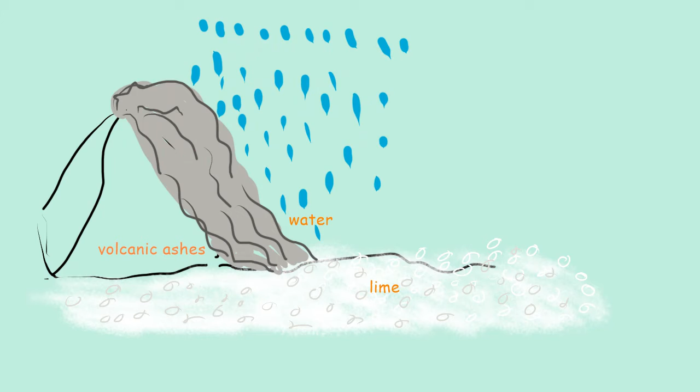In fact, the origin of hydraulic cements goes back to ancient Greece and Rome. The materials used in these buildings were lime and volcanic ash that slowly reacted with it in the presence of water to form a hard mass. This is the definition according to the Oxford Dictionary.

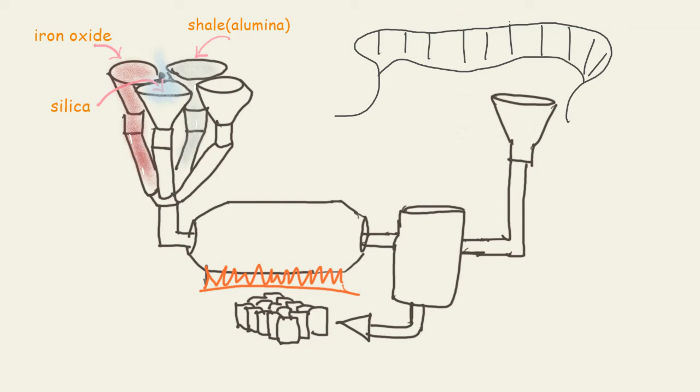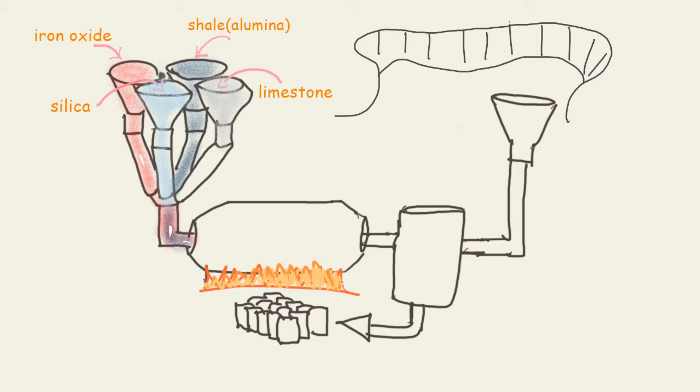Let's see what goes into the manufacturing of cement. Quarried and crushed iron oxide, shale, silica, and limestone are mixed together and run through a rotary kiln. This forms clinker, which is ground to fine powder and mixed with gypsum, and then bagged for sale.

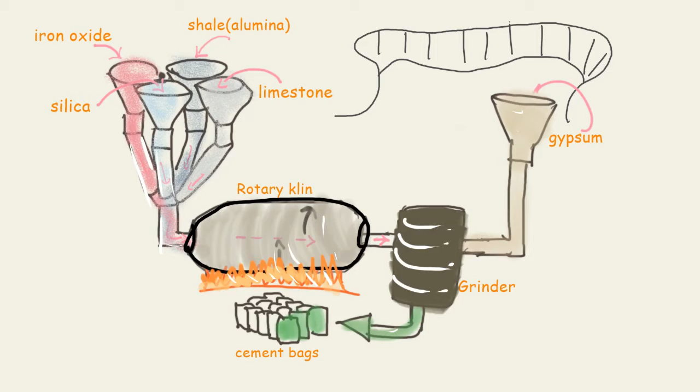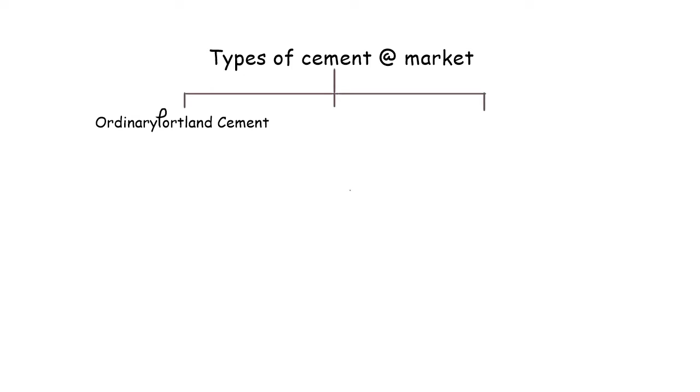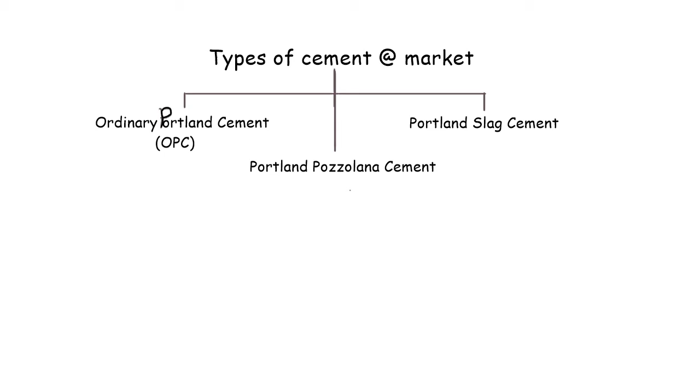If we break down the types available in the market, there are generally three: ordinary Portland cement, Portland Pozzolana cement, and Portland slag cement. These three are known as OPC, PPC, and PSC in short.

Usually we buy ordinary Portland cement, that is OPC, based on their grades: OPC 33, OPC 43, and OPC 53. OPC 33 has mostly been phased out in the country.

This grade of cement is used for general construction under normal environmental conditions, but low compressive strength and availability of higher grades of cement have impacted the use and demand of OPC 33.

OPC 43 is nowadays largely used in plastering, flooring, and other non-structural applications where OPC 33 was earlier being used. It's used for general RCC constructions where the grade of concrete is up to M30.

The last one in the line is OPC 53, which is used when we need a higher strength concrete at a very economical cement content. This grade is used for specialized work such as pre-stressed concrete components and precast items such as paving blocks, building blocks, etc. There are also several other types of OPCs used in construction.

Starting with sulfate resisting cement, also known as SRC. This is used where concrete is exposed to the risk of deterioration due to sulfate attack, for example in contact with soil and groundwater containing excessive amounts of sulfates, as well as for concrete in seawater or exposed directly to the sea coast.

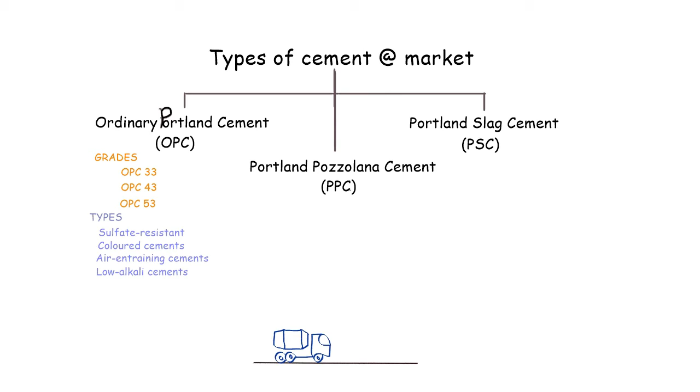Low alkali cements are used in concrete made with certain types of aggregates that react with alkalis to cause an expansion that can damage the concrete structure. Then we have the well-known masonry cements, used primarily for mortar.

These consist of a mixture of Portland cement and ground limestone or any other filler material with an air entraining agent or a water repellent additive. Waterproof cement is the name given to a Portland cement to which a water repellent agent has been added.

Last in the series is oil well cement, used for cementing works in the drilling of oil wells where they are subjected to higher temperatures and pressures. PPC doesn't have much variety in the market, so we can move on to Portland slag cement, that is PSC. One of its kinds is supersulfated cement.

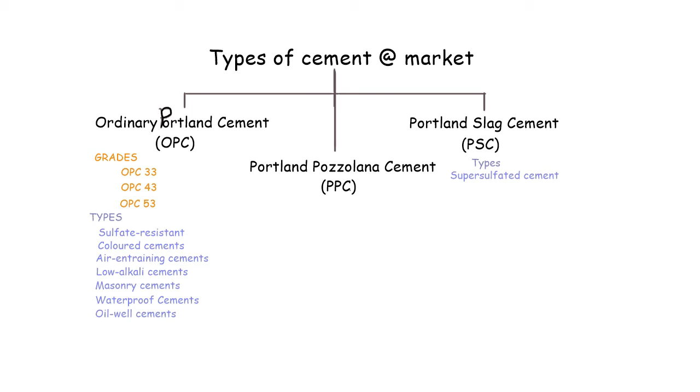The strength properties of supersulfated cement are similar to those of Portland cement, but it has increased resistance to many forms of chemical attack. Now here are the compositions of the three types of cement as we discussed.

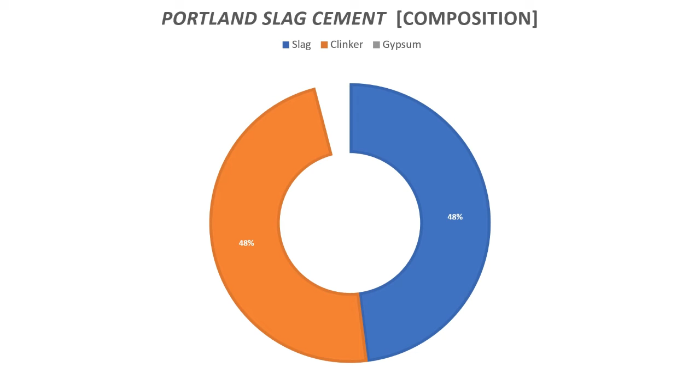I have added a few more types of cement simply for the sake of completeness of the topic.

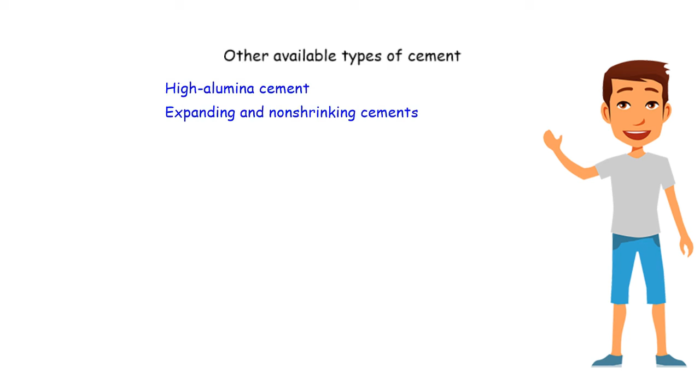What we have here is high alumina cement, which is a rapid hardening cement made by fusion of a mixture of bauxite and limestone. Number two here is expanding and non-shrinking cements. They expand slightly on hydration, thus offsetting the small contraction that occurs when fresh concrete dries for the first time.

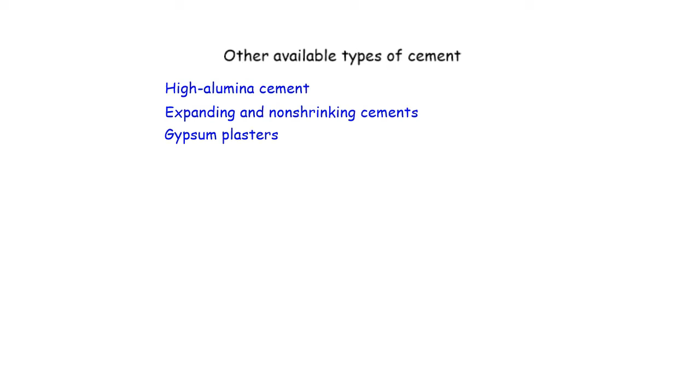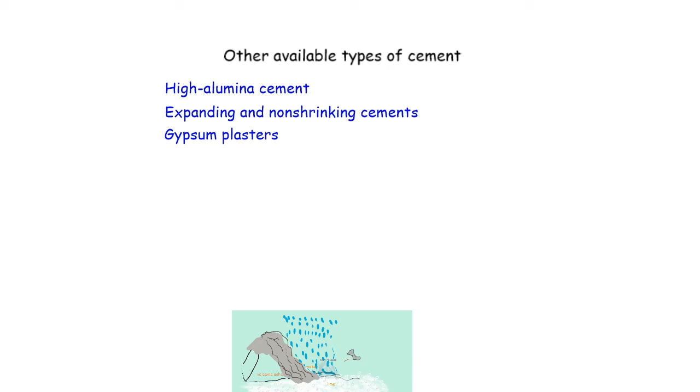Now comes the well-known gypsum plasters. These are used for plastering, the manufacture of plasterboards and slabs, and in forms of floor surfacing materials. These gypsum cements are mainly produced by heating natural gypsum and dehydrating it to give calcium sulfate hemihydrate.

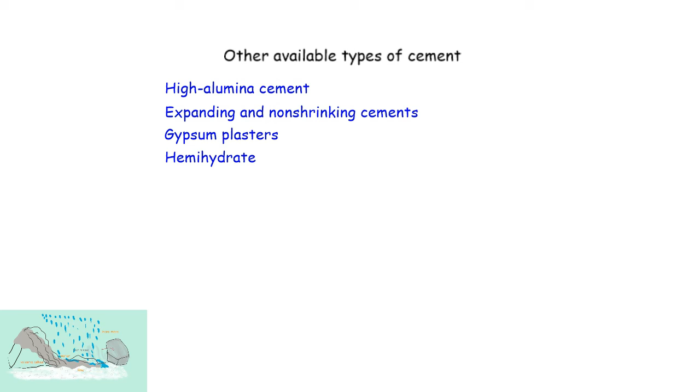This hemihydrate is also known as plaster of Paris. This sets within a few minutes on mixing with water. For building purposes a retarding agent, normally keratin, a protein, is added.

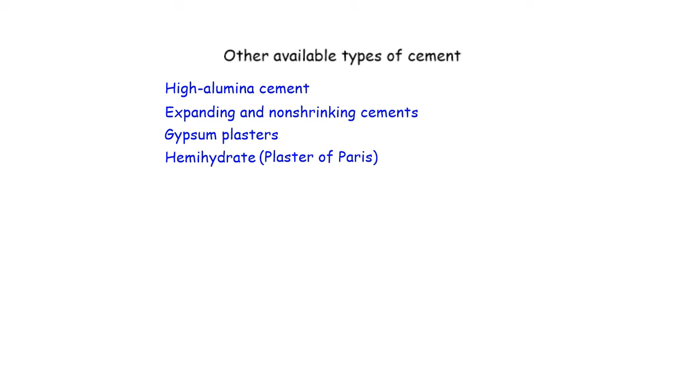Plaster is a building material used for protective or decorative coatings of walls and ceilings, and also for molding and casting decorative elements.

Little insights on OPC cements: these are the most commonly used cement worldwide. It is hydraulic, meaning that once curing with water is complete, it becomes water resistant.

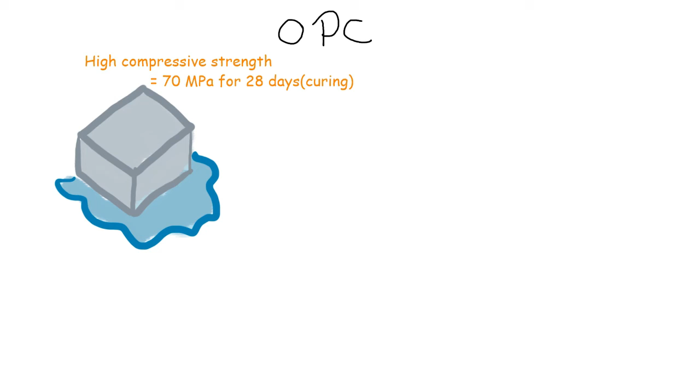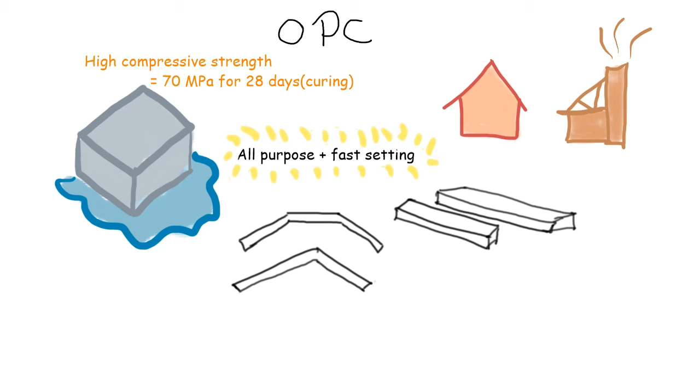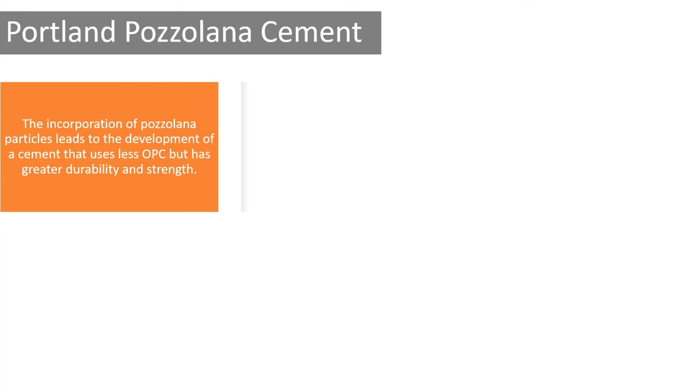Next is the PPC, Portland Pozzolana cement. The important fact here to be noted is that PPC is environment friendly as it consists of fly ash in some specific percentages by parts, which is a waste product of burnt coal, usually collected from thermal power plants.

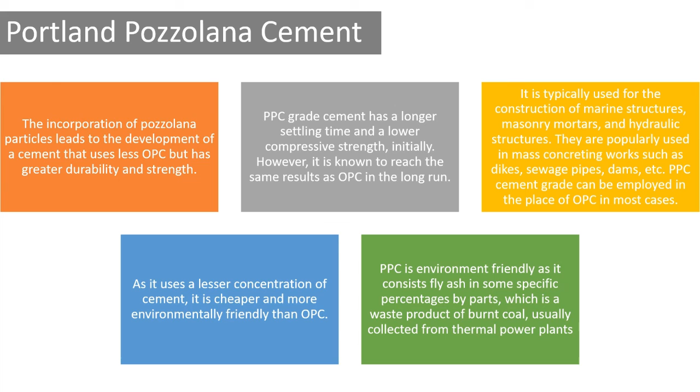Finally, the last one is Portland slag cement, that is PSC. This is commonly found in ready-mix concrete, precast concrete, soil cement, and high temperature resistant building products.